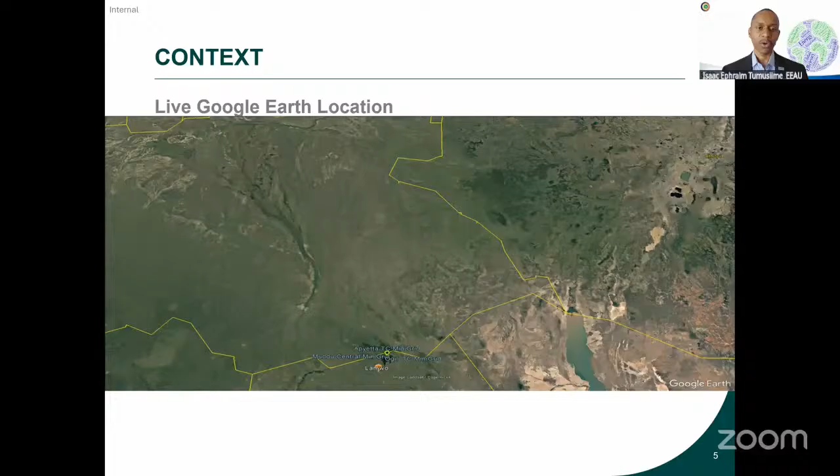Now, for those of you who have not been to the sites, this is just a live Google Earth video showing where the sites are located, so you can understand the conditions in these mini-grids and the locality. Specifically for the area of Lamwo, according to the research we've been able to do for this particular project...

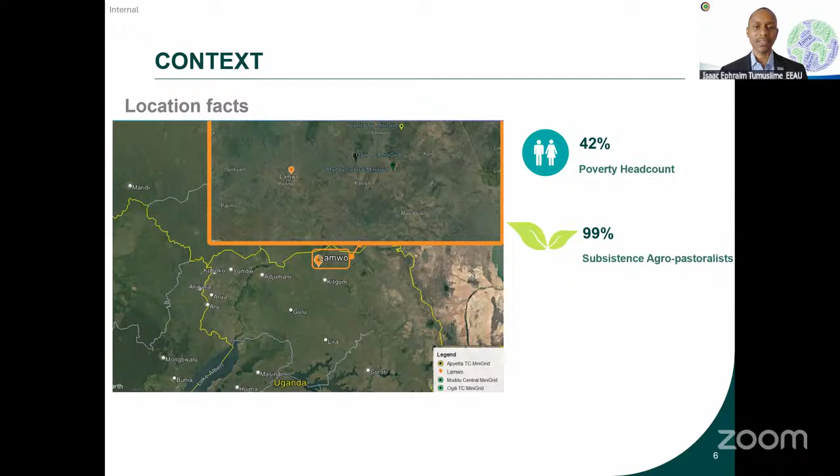There's a 42% poverty headcount in this area, and the majority, 99% of the individuals in this area, are subsistence agro-pastoralists. Obviously, because of the remoteness of the location, as you've seen in the video and as you can see in that picture, they do not have access to the grid.

That's where NOAA comes in as a significant partner with the government, to see how we can promote energy access in these remote locations by closing that gap. They implemented this project back in 2021 and have been able to achieve some significant gains.

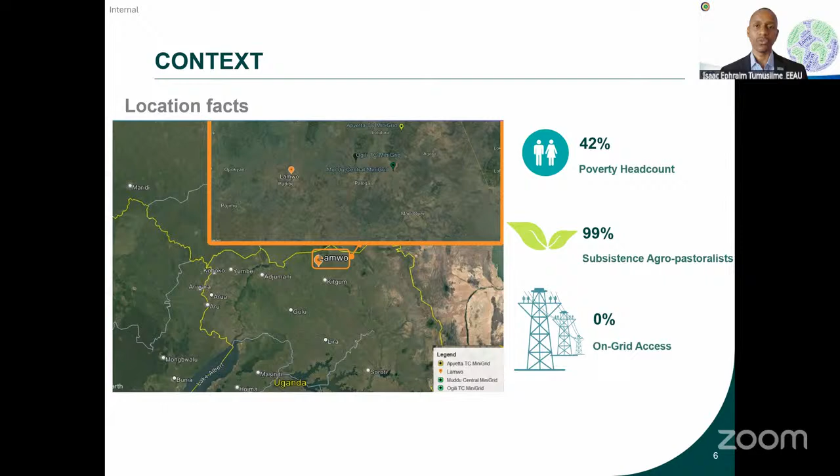On the Ugandan space, Uganda's Vision 2040 encapsulates the reality that energy is a vital component of a country's development. So far, from the current published research or articles, our access has increased from 11% in 2010 to 60% currently, with 25% of that on-grid and 35% off-grid.

Based on project facts from the UN and what we've already talked about regarding the poverty aspects, and the fact that grain milling is a key driver of the economic welfare of these communities, we said, how can we support NOAA to improve the overall sustainability and efficiency of their operations, starting with the millers, so these communities benefit from the milling operations.

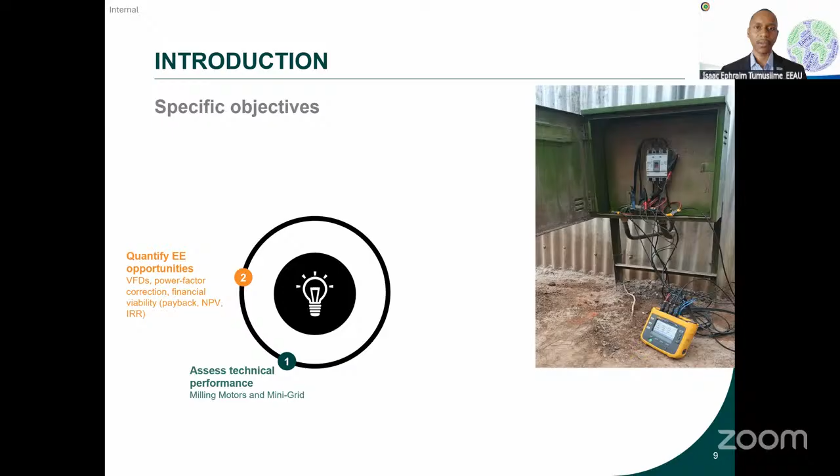We also did a quantification of the energy efficiency opportunities, which we'll talk about in detail later, but we focused on bankability. In the event that NOAA decides to approach a banker, they should be able to have the basic financial metrics like payback, net present value, and internal rate of return of these particular measures we're recommending.

The other objective is to assess the socio-economic impact. What would happen if millers and the entire ecosystem of the mini grid was more efficient? What impact would that have? We'll talk about that later.

We also built a case to indicate that there is indeed a case for efficiency in the mini grid, starting with the anchor loads but also going across the entire ecosystem. Then identifying the barriers that could prevent the operator, NOAA, the mini grid operator, but also the milling owners, from adopting energy efficiency, and how we can together co-develop or co-create solutions that will eliminate or limit these barriers.

As I said, from the literature review, mini grid sizes range from between 10 kilowatt to 10 megawatt, and they are connected systems with storage. Interestingly, particularly for NOAA, we did not find that they had diesel generator sets set up in their ecosystem, which was a very good, interesting find.

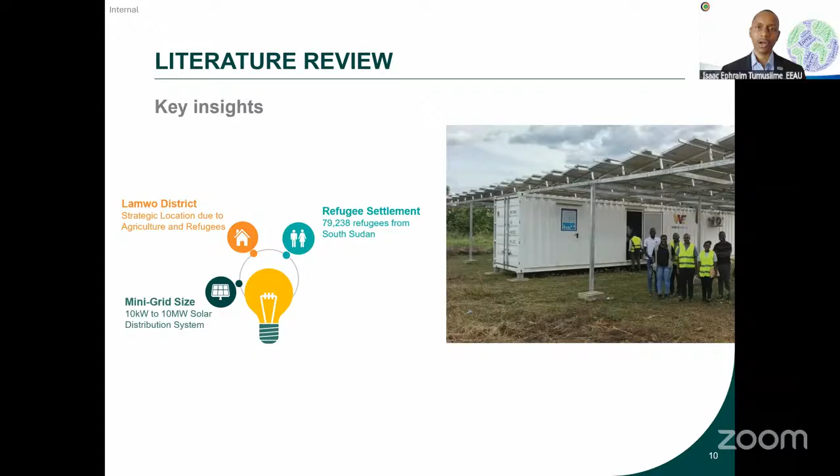As we've mentioned, it's located around the Lamwo district, as we saw in the Google live feed and the image. It's a strategic location because of its position between Uganda and South Sudan and the high refugee settlements around that. About 79,238 refugees come in from South Sudan to settle in those areas. So there's an opportunity to support these vulnerable people by ensuring that whatever operations are done at the mini-grid space drive significant value back to them, while also benefiting the mini-grid.

The mini-grid, as I mentioned earlier, was launched in 2021 through funding from GIZ with support from the European Union. And more is yet to come, as I mentioned.

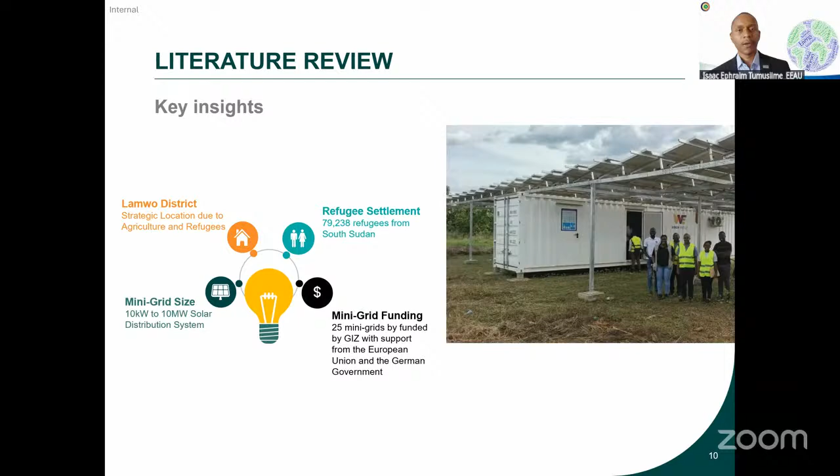To be able to gather the correct data and get the insights we've been able to do, we followed a 4-step process. It was iterative in that even after we collected the data, we had several interactions with stakeholders like NOAA and their technicians, to really understand what we're finding and develop recommendations that are actually implementable by NOAA.

From the input side, we gathered mini-grid data, which was provided by NOAA. We also tried to get existing machine data from the mill operators, as well as energy consumption data, recorded within Excel or in their systems, and stakeholder data from the community.

Then we did a baseline assessment: a motor performance assessment, technical gap and efficiency opportunities assessment, and the impact assessments I mentioned earlier. We've already implemented a training with NOAA, which was very successful, and we believe that from that training, there is significant traction in terms of bringing efficiency to the mini-grid space.

We developed an inception report, and we've already developed the baseline assessment tools that we've submitted. We're in the process of concretizing the insights from the training and insights we'll get from you through this webinar to come up with a holistic baseline report that we can use to disseminate to other mini-grid developers like NOAA. We'll also have a summary infographic that will summarize the key findings, takeaways, and next steps for NOAA and other mini-grid developers of that kind.

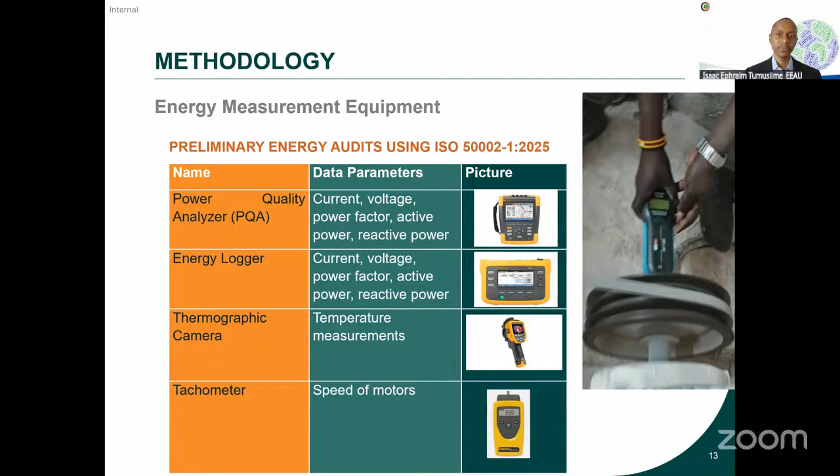All right, thank you so much, Mr. Isaac. Can you confirm that you can hear me? Loud and clear. Okay, thank you so much for that introduction. Yes, like Mr. Isaac said, my name is Talib Pasquale, and I work for EACRE as a Sustainable Energy Officer. It is a pleasure to have taken part in this study.

So we'll begin by looking at the key parameters that we have summarized into this table. Isaac, please put all the data on the table.

Yes, thank you. So like Mr. Isaac said, our study focused on Lamwo district, and we have visited 3 mill customers, or 3 millers, where we have measured all the data that you can see on the table. And the 3 mini grids that we visited have different sizes.

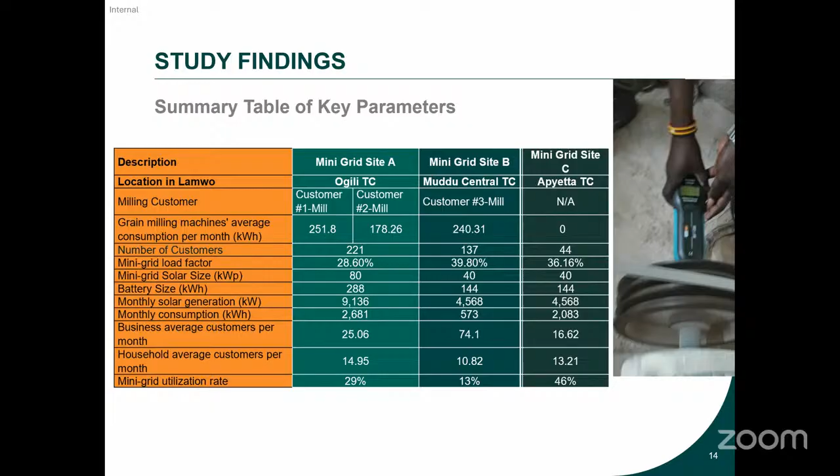Ogili is 80 kilowatt peak, and then Muddu and Apyetta are 40 kilowatt peak each, with a battery storage size of 144 kilowatt hour each, while for Ogili it is 288 kilowatt hour.

Then if you look at the number of customers connected to these different mini grids, Ogili has the majority of connections at 221, while Muddu follows with 137, and Apyetta has the least number of customers connected at 44.

Then the monthly generation for Ogili is 9,136 kilowatt, and for Muddu it is 4,568, which is the same as the one for Apyetta.

And the monthly consumption for Ogili is of course the highest at 2,681. And the one for Muddu is at 573, while for Apyetta it is 2,080. And the business average customer per month, we have 25 for Ogili, for Muddu Central that's 74, and for Apyetta it's at 17.

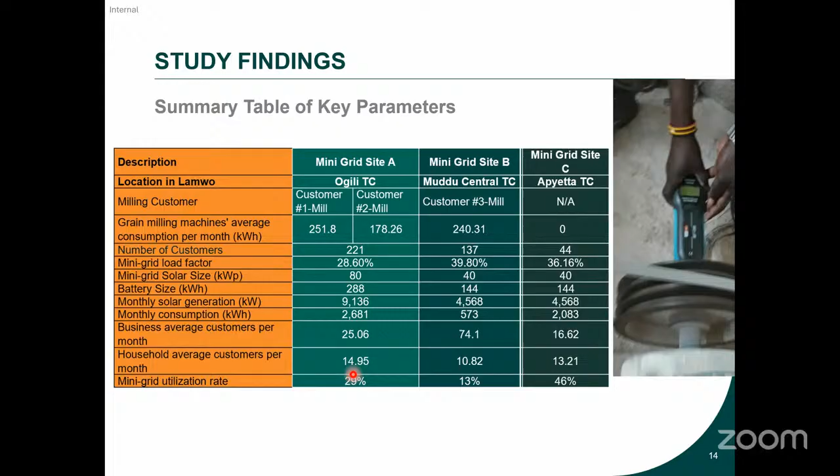While for Ogili at 29%, despite consuming the most overall energy at 2,681, its massive 80 kilowatt peak solar array keeps its overall utilization modest. Please, can you go to the next slide?

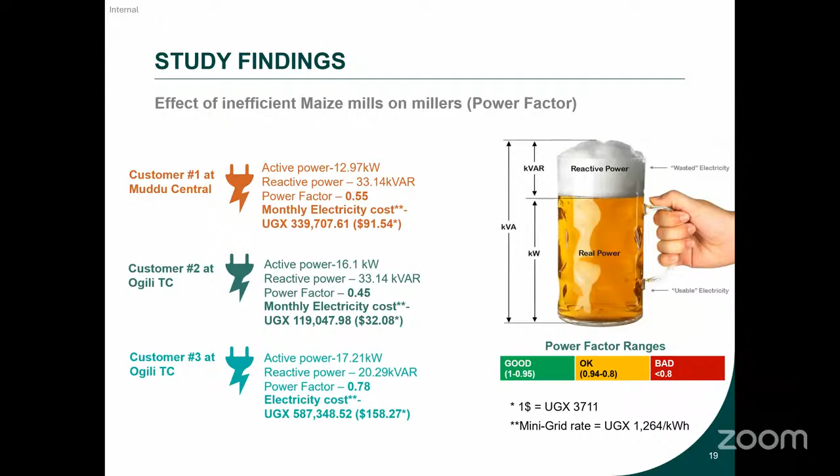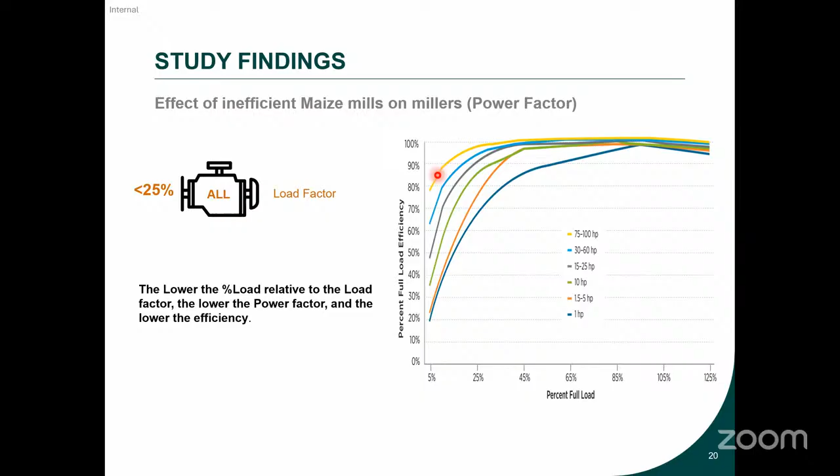Now, when the load drops below 25%, the efficiency curves for every single motor size also decline sharply. We can move to the next slide for the sake of time.

Now, the audited mills that we audited are operating below their rated capacity, or underloaded, let me say like that. As shown on this graph, when motor output drops, the efficiency curves also decline rapidly.

Now, an IE2, which is the International Efficiency Classification of Motors, among the motors that we audited, two mills have IE2 motors, and then one mill has an IE3 motor. So this IE2 motor operates at 88.4% efficiency, while IE3 operates or delivers around 92.1% efficiency.

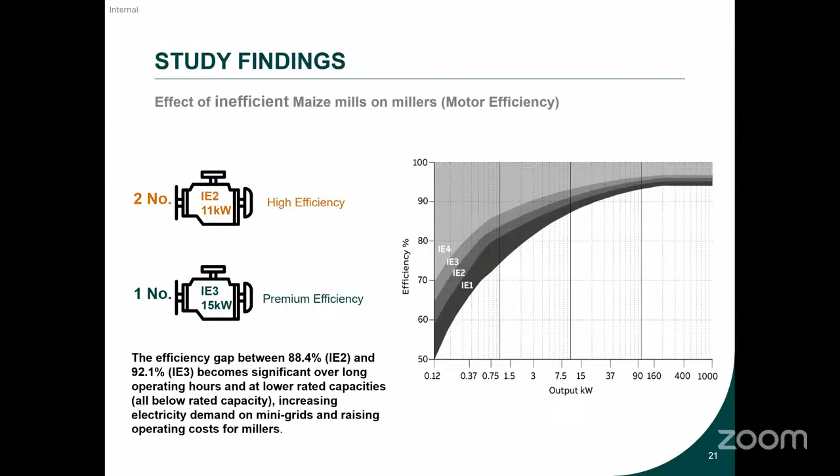Now, while this 3.7% gap seems small on paper, it becomes massive over long daily operating hours. So, all right, thank you. And then,

While we were doing our audit, we noticed that all the millers don't have an energy efficiency or energy management system that they are undertaking. For instance, they don't even keep records. The maintenance is done based on when the system has failed, meaning it is corrective maintenance that they always do, and they don't have variable frequency drives, and no energy management system in place.

And we realize that all these are happening because they have not been well oriented on energy management, whether they should keep records, the importance of record keeping, and even the importance of preventive maintenance and all that.

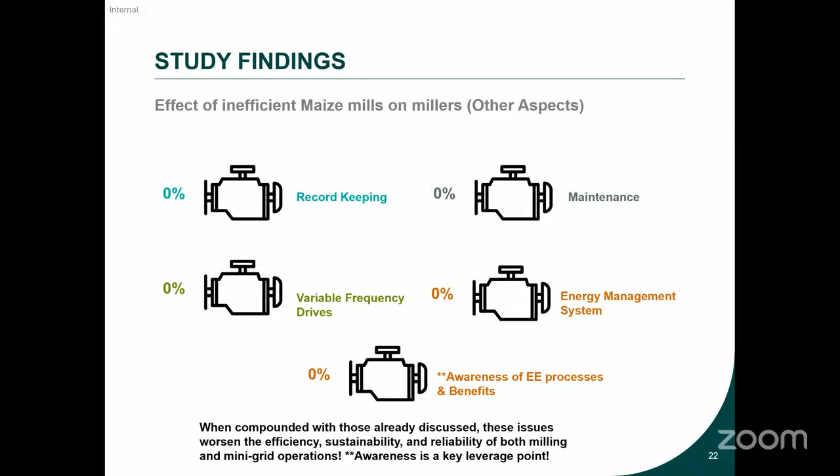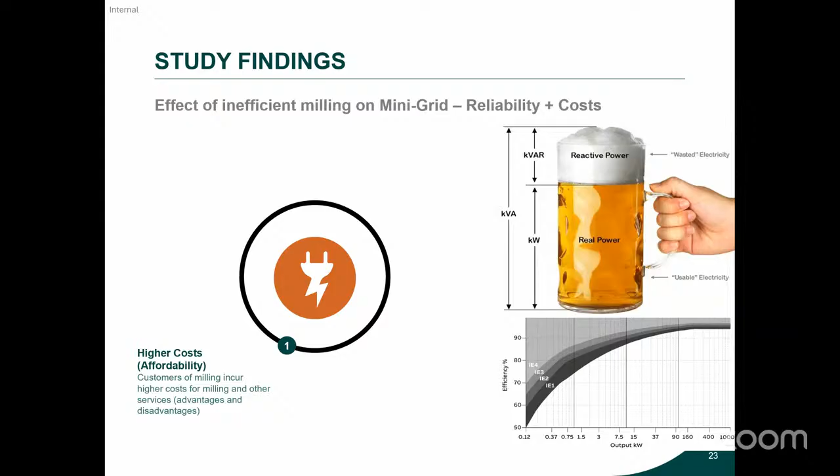So with this, our low-hanging fruits that we recommend, as a result of this study, is that extensive awareness creation should be done to all the millers who are now operating, and even to the future millers that will come. And then now, let's go to the next slide please.

And the back and forth movement of the power as a result of the wasted electricity causes high line losses, causing the cable to heat up, which increases generation losses. And as a result, the voltage also drops. The voltage drop, because of the oversized systems, the high rate of reactive power, and all that, gives a lot of strain to the system, thereby also leading to outages or shutting down the system at some point.

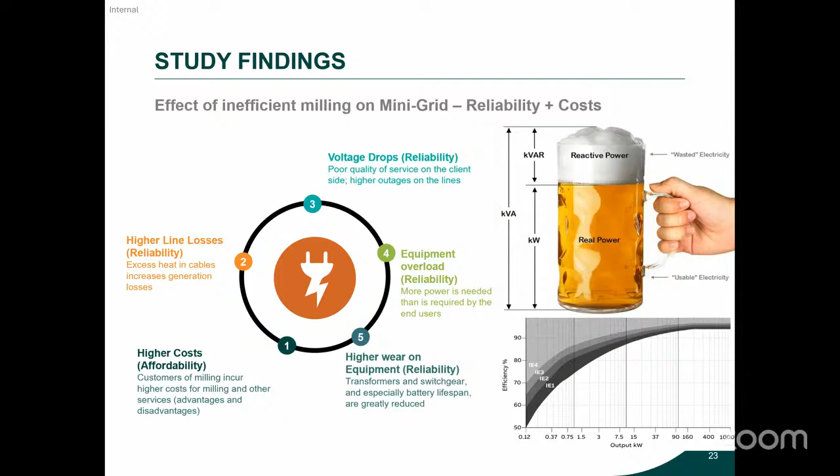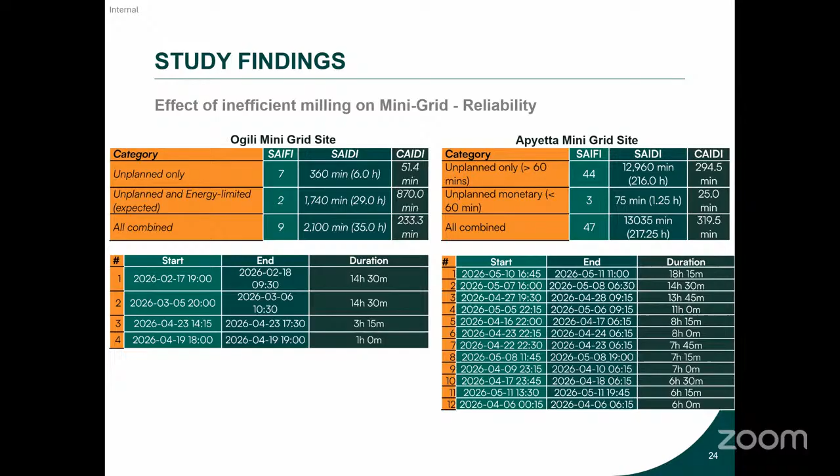Thank you very much, Talib, for that. Sorry for overshooting the time. I'm going to be very fast for the next sections.

Maybe just a brief on this: the data for Ogili is not complete. If it was complete, then the picture would be a bit different.

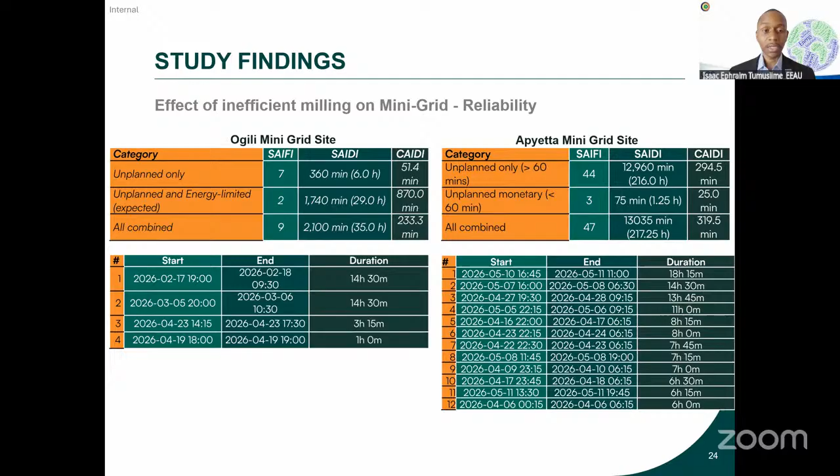On the enterprise level, it has to do with the costs per ton for the millers, the effects of downtime and motor replacement cycles.

For household, it's the affordability. As the energy cost goes up, the affordability for the output, which is the maize or the cassava, becomes expensive.

For the wider community, the affordability of the energy, because now a lot of it is being wasted, it gets more complicated for other services. And for the mills, we found that the youth and the women are actively employed in the milling operations, and if they are not able to afford, then it affects the aspects of gender inclusion.

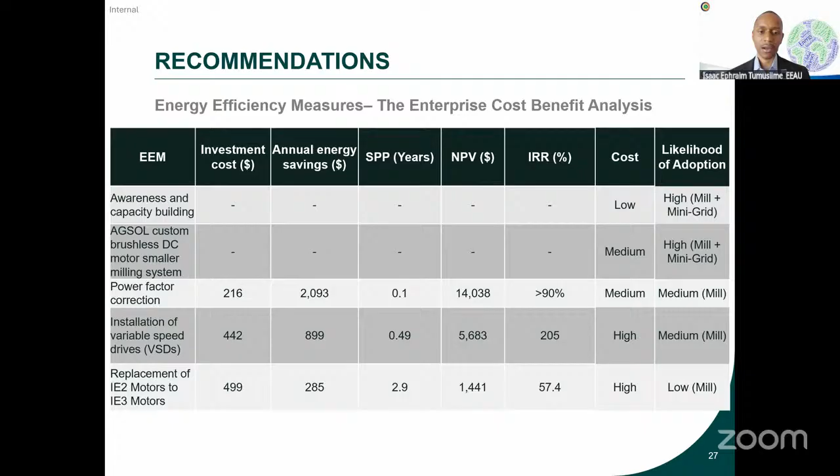We've also done energy efficiency cost-benefit analysis for the interventions, basically to show that actually they are cost positive if they are considered.

Then also for the medium cost, we see that it's an affordability intervention that needs to be considered, and I'll talk about that later as we consider those technologies to be implemented. But to make this sustainable and long-term and impactful, we believe that an energy management system needs to be introduced at the system level, at the mini grid, and then that guides all the operations downstream.

When you come to talk about the affordability challenge, we think that if the mini grid operates an on-billing mechanism, it is possible for the cost of these interventions to be lower, but also to create a sustainable way in which the grid ensures that whoever is connected to it, its network is as efficient as possible.

We believe that there's an opportunity also for development partners to come alongside the mini grid to see how to create opportunities through result-based funding and grants that can accelerate the adoption.